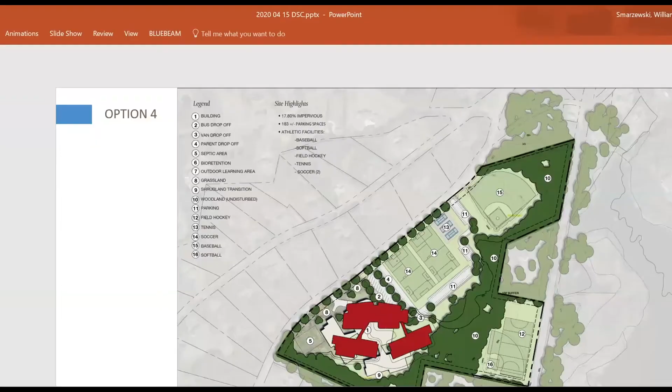Yeah, we have Bill Smarzewski from our team. So we have a small slide deck today that recalls what we had previously, as well as a sketch response to the discussion that we've had. So we can work our way through those.

I don't know if you want to, Bill, we just go right to the beginning of this one, right? Yeah, so Court, what we might be able to do is make this a dialogue through the slides to share the discussion that happened. I think that'll bring us all together, and then we'll try to manage the conversations so that we capture what they've done on the design side, any updates or changes or modifications, and then back into where it came from, what questions it answers, and what questions we want to wrestle with today.

That sounds good. So would you like us to work through a brief overview of the options and what we heard and how we responded to them? Is that what you're asking to do at this point? Yes, I think that's a good idea, to distill what you've heard and then discuss how that relates to these designs.

And we're going to give you feedback. One, do we think you heard it correctly? Do we think we communicated it correctly to you? And two, what do we do then with the outcomes of these questions and the assessments that we're making? So yeah, let's take it away.

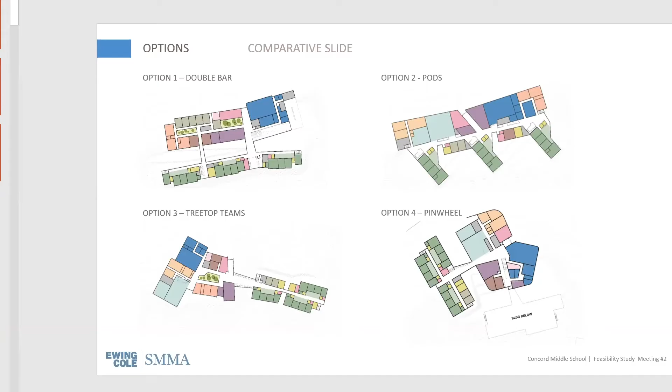Okay, so in general, we've been before you on February 13th, again on March 25th, and then today. We want to continue to show you the development of the diagram. This was what was presented, a summary of the organizational diagrams or floor plans presented on March 25th: options 1 through 4, with the names double bar, pods, treetop teams, and pinwheel.

In general, we heard some feedback around issues of fidelity of teaming, but then also on April 10th, the whole discussion of fidelity of grades was reinforced - not only the teams, but the grades. So the position of on and off team classrooms became quite important. The other things we heard were really important relative to solar orientation, integration with the topography, and impact onto the existing tree line and characteristics of the site.

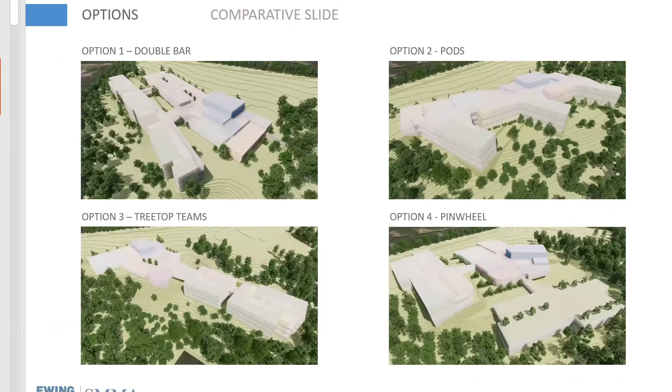Bill, just go to number 2, just as a reminder where we were, the overall forms, and then number 3, the site plan. So, yeah.

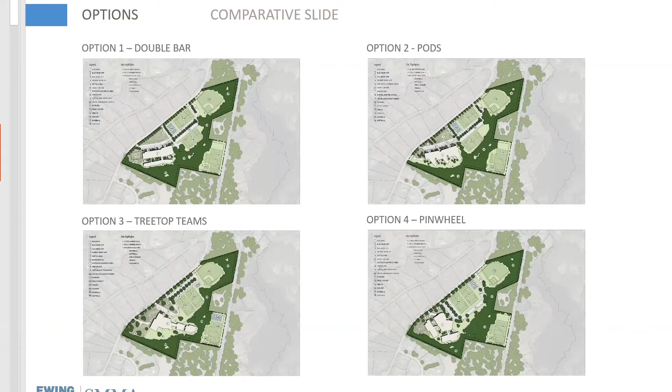Forgive me, with your permission, I want to pause just for a moment. I think this is going to help a few people based on conversations I've had. I want to hear from you, and from Lori, in regard to how you, Justin, and others are defining team. It's a concept we've used without really getting explicit with the definition, and this has come up a couple of times recently. Can we pause just to do that? I think it's critical that we do it now and not have to return to it later.

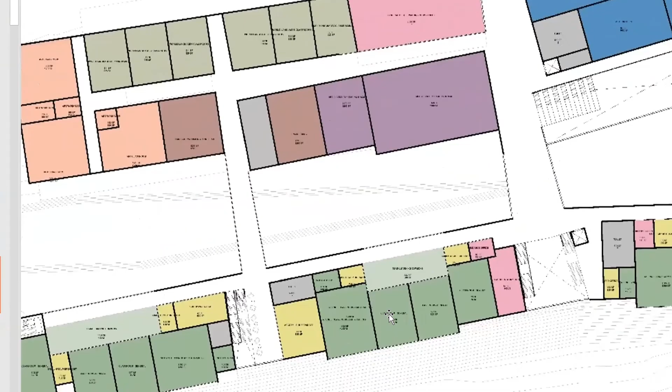Sure. Lori? Yeah, I'll kick it off and then Justin should fill it in probably. Team is really the cluster of core content areas within the grade. So you're breaking the grade into smaller components, and we've been talking about 3 teams per grade. So you divide the grade level into 3, and each team would have a core content instructor on it, which would be English, math, science, and social studies. Then they become a unit that the student stays centered in for at least those 4 classes.

And that allows us to have a much more in-depth view of the whole child, because those teachers are set up to have conversations with each other so they can talk about how Johnny is engaged and performing across all 4 subjects, and they don't just have that individual lens. Then they're integrated back into the larger part of the building for the off team, which you keep hearing us talk about - the off team classes, which might be a teacher who teaches more than 1 grade and certainly more than 1 cluster of kids.

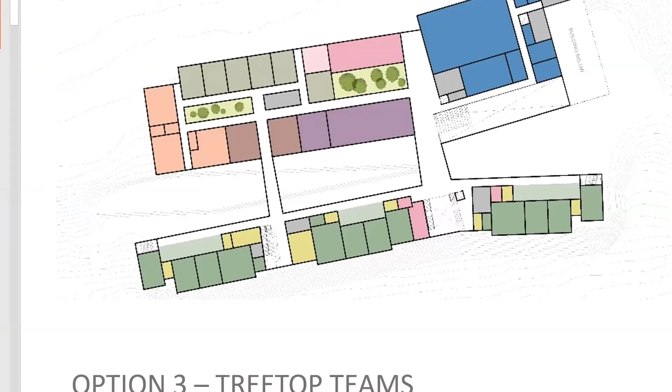All right, so population dictates 27 classrooms, approximately 9 per grade. We've got teams that are oriented around core subjects and disciplines. Is there also a classroom number, a number of classrooms that align with what you call team?

Yes, and maybe Keith can show where those classrooms match up with what would equal the space for a team. So in this diagram, and these 4 diagrams - we'd like to keep them in comparison to one another rather than digging into one of them in particular - the darker green representation of the 4 classrooms is the core representation of the team that Lori just described.

Bill, for instance, if you could highlight on option 4, a team that is organized around a common meeting space or a hub. So within a particular grade, there are 3 of those teams, and those teams are then supplemented by off-team classrooms, shown in the gray color, and by special education support spaces, highlighted in the mustard yellow color. The other pieces proximate to the educational community are some administrative areas, shown in pink.

So in general, if we're looking at option 4, you can see 3 separate teams. Bill, if you could point to the core teams, and then highlight the relationship of the off-team classrooms. If you look to the upper right within option 2, the pods, again the team itself would be the 4 darker green classrooms. Immediately outside of that is the lighter green collaborative space. There are some workshop rooms that face there, and then the off-team classrooms are just along that main corridor, together with additional support spaces. So that's the organization through each of the options.

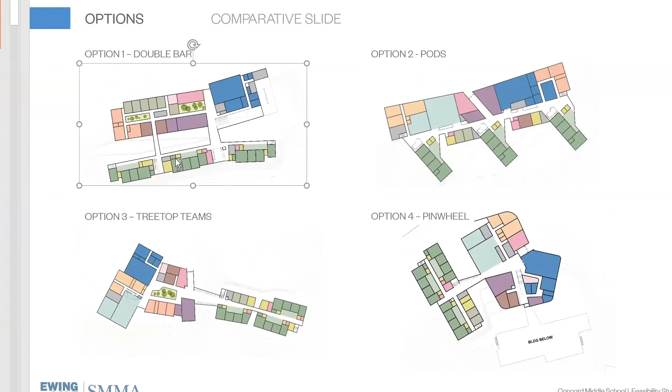So Bill, if you could just highlight those in option 1, where the off-team classrooms are relative to the team. So in those spaces right there, and generally world language classrooms are there.

Is that helpful, Court, in terms of how they're represented and dispersed within the various options, or is there some other question I can answer that helps it become more clear?

Three grades, nine teams, and nine teams require 36 classrooms, although we have 27 traditional classrooms called out in the spreadsheets. Am I correct, Lori? I'm trying to mix and match that in my head without all the documents in front of me. I would defer to Keith here, but I think the other nine classrooms Court is referring to would be the science classrooms included within each team. Right? Correct. That's how you get to 36.

So yeah, I think that's correct, Keith. I just wanted to make it really clear to everybody how the terms align with the other terms, because I think it's going to be useful as we dig deeper into these designs and which ones seem to favor the approach that the leadership team, Lori's leadership team, is promoting. I'm sure we'll get there pretty soon. Thank you.

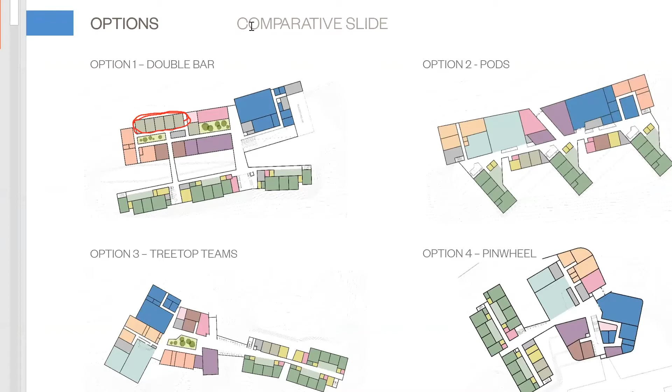Bill, if you could just highlight that in option 2 so everybody can see what we're talking about. It's that color there. So you can see the green is the cafetorium and the orange there. The other specialty classrooms are the art classrooms, and they're just a little bit more pinkish, and they're there.

So there's the team, the off-team classrooms, there's art, there's music, and then there's a kind of technology component. The technology component is shown in that more brownish tone that Bill is highlighting. That's things like digital literacy and related topics. Hopefully that shows the major organizations of the instructional components, which if I could generally categorize them, would be the team, the off-team classrooms, and the specialty classrooms.

With that, we would be prepared to talk through, maybe we could just go to number 3, slide 3 for a second, Bill.

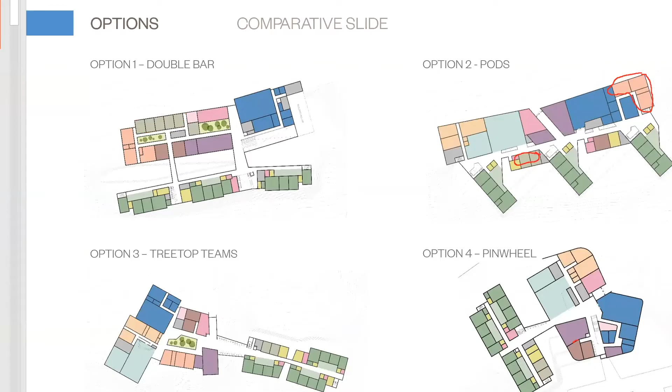So Court, we're hearing feedback relative to the educational leadership team, and we're hearing feedback from the design subcommittee. We think the educational leadership team is communicating things to us about the fidelity of teams, how students interact within teams on a given grade, and how they circulate between what might be considered a team classroom, the team hub or common space, and then also both the off-team classrooms or the specialty classrooms. At the same time, we're hearing feedback from the design subcommittee, which is focused on things like ideal solar orientation, how the building sits on and recognizes...

I think we lost you, Keith.

But I think he's getting to the good point where we're trying to get some convergence on this. Yes, we talked a lot about that the other day too. They've been taking all the feedback that Court, you did a nice job of aggregating from the design subcommittee. So they've been factoring all those pieces in as well.

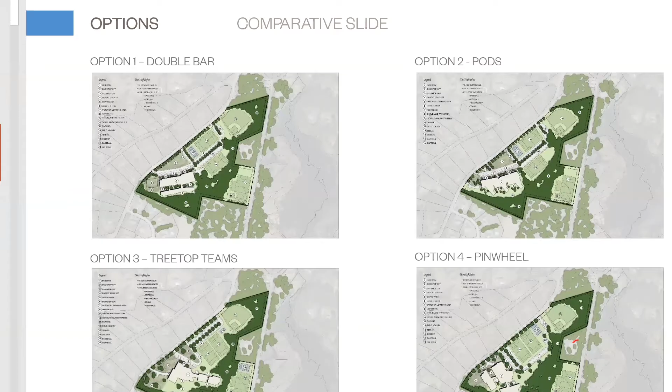Lori, while we're waiting for Keith, I don't know if we'd be moving too fast to have you complete the thought that started.

So from the design subcommittee, we heard about the solar orientation and the importance of that, the orientation of the building in relationship to the public street, and the concern that some of the schemes didn't have enough frontality. Also a concern, in particular in one or two schemes, to what extent the scheme was actually extended into the woods. That was the case of scheme number 3.

So what we've tried to do is begin, at least in a couple of the schemes where the solutions were more obvious, to try to respond to some of this conversation.

We also heard that people really liked the idea of a commons where in one space you can actually view the gym, the cafetorium, and the media center. That's sort of a public space at the entryway which allows you to survey the entire public aspect of the project.

I briefly lost my connection, but I'm back.

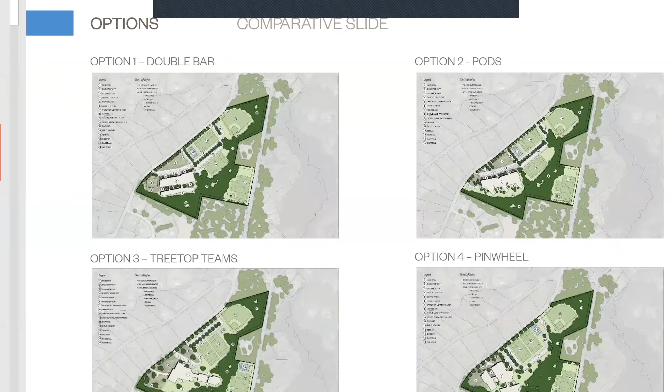So Bill, if you could go to slide number 5 for us. And can you pan back just a little bit so we're able to see the whole image? I guess maybe I just dropped my.

Court, in our dialogue thus far and in our discussion relative to option number 1, in our discussions with Lori and Justin last week, and then also our discussions with the design subcommittee, there wasn't a lot of programmatic or educational adjustment to option 1.

One of the things that we did realize in the generation of the data is because we have these 2 courtyards in the western portion of the northern floor plate—Bill, if you just point to those—that was driving the area of enclosure for this option significantly higher than each of the others, right? And so really what we looked at is whether there should be a modification to make it more apples to apples. You could potentially look at reorganizing that portion of the plan to remove the courtyards and therefore reduce the amount of surface enclosure and get it a little bit closer relative to the overall cost. You can see that illustrated on the right-hand side under the April 15th piece.

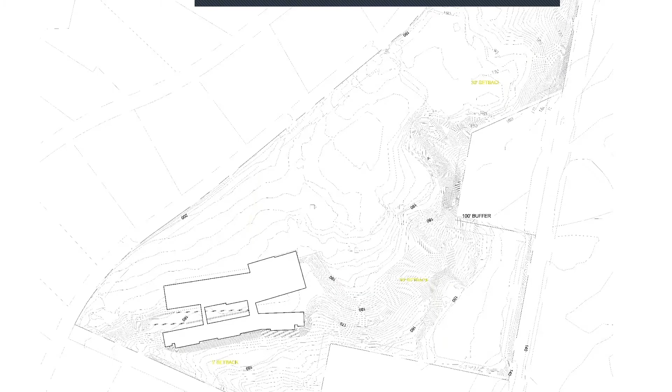Good, so Bill, if we just continue to move through the deck, this will show you, this was the site plan we had shown previously with the footprint from March 25th. That footprint has been modified just ever so slightly. You can see that we've taken the courtyards out, and when you place that over the previous plan, you can see it's fairly quite an innocuous adjustment to the footprint. But notice in the lower right-hand corner, the north arrow.

So just to, as Dawn said, this is a strong solar orientation for the entire building. So that sequence of slides shows the responses that we've made to each option. And if you're ready, we could move on through option 2.

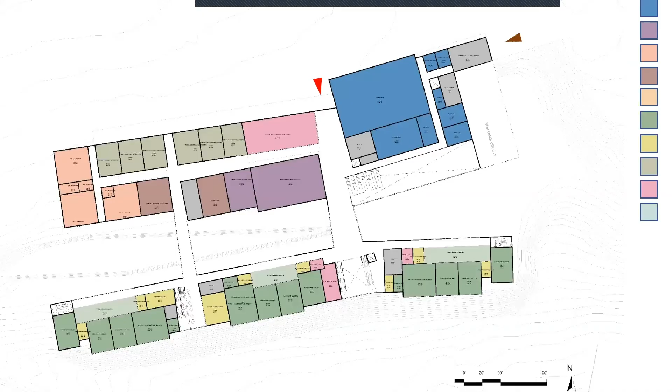Option 2, actually we have not made any adjustments based upon the feedback we've heard or the way that they function. So on the right-hand side you can see where we were on March 25th, and for today we have left this one essentially unchanged and intact.

Court, is that adequate for this, or would you like a little more discussion of how Lori and Justin see how this one might function? Or I think we need to hear from them as to how it supports or doesn't support their approach relative to the other 3.

So I'll start that and then Justin can hop in. Again, the team spaces are distinct, as you can see. So that was a large part of our discussion, that this would not lend itself to grade-wide activity as much. It's a very consolidated plan, so travel time is likely to be improved for sure.

We talked quite a bit about the off-team classes, which you now see are in between the teams. I think we've weighed pros and cons of where some of these off-team classes are, particularly world language, which is so close to a core content area for us that I think we did prefer it having more proximity to the teams, whereas in the first one it was very separate.

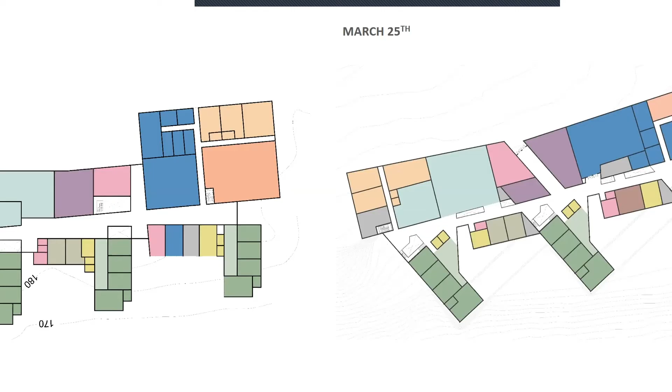Can you go back to the site plan, Bill, that shows this relative to the northern orientation? It's kind of, by the nature of the scheme, Keith — the long axis of the building versus the short axis of the wings — going to result in one of them getting the wrong solar orientation. Yeah, by definition, the only way to solve that is to array all the classrooms in a long corridor, which will make this building exceptionally long, and a very problematic long corridor as the spine of the building. It'll be sort of scheme number 1 on steroids.

Yeah, exactly. Thank you. I wasn't advocating for it, Saul, so much as simply wanting to hear, for purposes of the meeting and the record, that you took a hard look at it, and this is what can be done with option 2 vis-a-vis orientation. Thank you. Yeah, now, option 3.

Sorry, before we jump to that — this is Matt Root. Court, thanks for asking that question about orientation. Can we just dwell on it for a second? It looks like the furthest out classroom still has pretty good orientation, right? It's got two sides that are somewhat facing south. It's really those three classrooms more interior within the team structure that are starting to face west, right? Mm-hmm. Yes. But it could be strategic window placement and exterior shading that could help mitigate those issues a little bit.

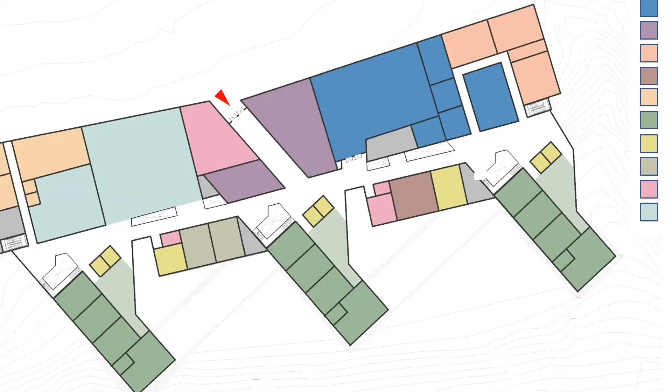So I'd also like to make sure everybody understands that when we met on April 10th, we reviewed every option from an educational perspective, then looked at each option's ability to be manipulated, advanced, or revised to address those concerns. So it's not like we didn't look at number 2 or number 1 and make more aggressive changes — we thought that through discussion, the possibility for modifications to 3 and 4 were most pronounced, and you'll see a much different approach to those. So, option 3 — you can see the advancement of the idea from February 13th to March 25th to April 15th.

So the big advancement from the 13th to the 25th was to integrate the off-team classrooms into their own little pod, so that they're fairly proximate to one of the teams, and to create more proximity between the various hubs. As we talked to Lori and Justin last week, it became apparent that some connectivity between those team spaces to reinforce the sense of a grade was increasingly important. So you can see what we've done here: in addition to rotating the building to an ideal solar orientation, we've taken the northern team, slid it to the middle of the educational community piece, and flanked it with the off-team classrooms. Now there's a much more interactive location of the various team spaces, and getting from any given team to any off-team classroom is quite dynamic and proximate.

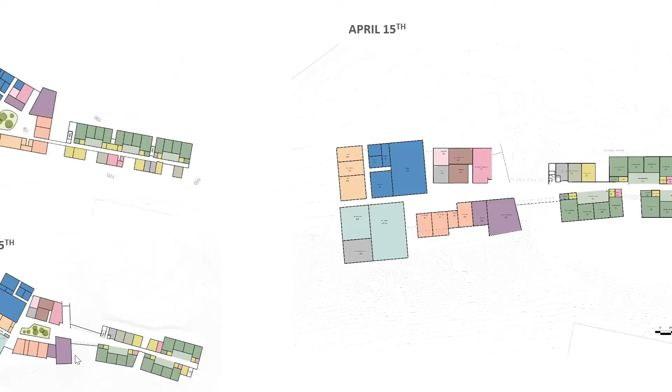Did we lose a bridge too? Did the previous one have it? No, it's still here in the central connection. Well, the central one, but was there a smaller one in the previous design? No, I think that was scheme number 4. If you go to the floor plan, Bill—there's not one between. Okay, no.

One of the really wonderful things about this is that each of the hubs is surrounded by their team classrooms, but they also have direct exposure to glazing that gives views to the north and south. Not only does that introduce natural daylighting into those hub areas, but it almost expands and captures the circulation corridor for greater utility during teaching times. While people are going back and forth between classrooms it functions like a corridor, but while teaching, it naturally expands the educational utility of those spaces and provides natural daylighting. We've pulled the building apart just a little to allow that to happen. There's also a natural cleft in the site—we use the word ravine, maybe exaggerated for the topography—and that's where this bridge goes over. So the building is still located in relationship to that in a smart way.

So I'm impressed. I've got a question or two, but I'd like to turn it over to Lori and Justin first, and then other committee members. What questions do we have? How does this optimize, if it does, the plans for teaching and learning, for community building, for team integrity, as well as grade integrity, if we could look at that. And then, of course, some of the aspects around likely efficiencies and economies around design and cost. Justin and Lori? Sure.

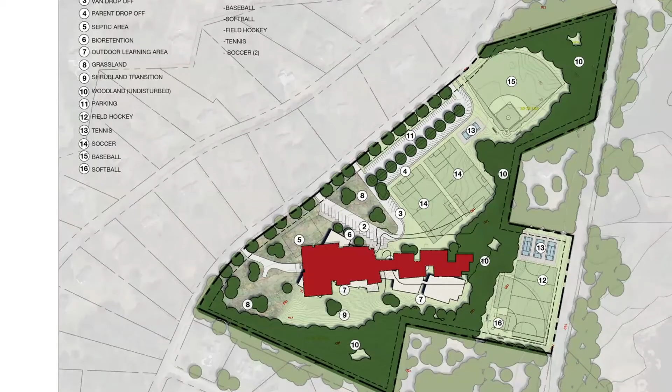Now, option number 4 also was ripe with modification opportunities. If you see again, the same pattern from February 13th to March 25th to April 15th—what we heard is that initially this option had tremendous potential for that grade fidelity we're talking about. It was the kind of grade level unit you see on February 13th that we actually imported into option 3 for April 15th, because of the proximity of not only the teams but the proximate off-team classrooms.

At February 13th, there was fairly significant concern that with the 3 one-story pods, it was taking up a lot of the available topography. So on March 25th, we took the eastern classroom community and stacked it on the west one.

It had great interactivity between the teams and their off-team classrooms, and it's also very proximate to the town hall component of the building, so the travel distance for a student to go to art, music, or the library is relatively short compared to the others. The Achilles heel of this one was a concern over the solar orientation of the classroom blocks—you could almost argue that 50% of them had east-west orientation rather than north-south.

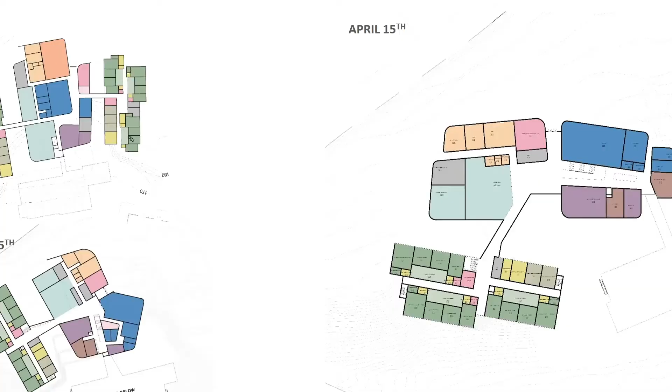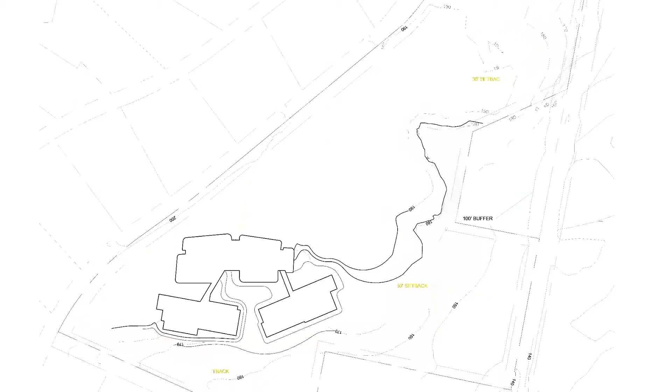So this was the previous orientation, and the criticism of it was valid, right? When you look at it relative to solar orientation, with our footprint modifications and rotation, you can see it's in a much more favorable position. And when you look at it relative to where it was, you can see it still retains the essential qualities we had, but also addresses some of the significant weaknesses that were in it.

One of the things that rose to the top in our discussions with Lori and Justin was the possibility of a sixth grade academy, that not only would the sixth grade have some grade fidelity, but they might even be slightly set apart from 7 and 8. And this one offers that possibility the most strongly, I would suggest.

Let me add to that so it's clear why that is. On this diagram, the colored team space that's green and shows all the color is a 2-story spot that could house 7 and 8. The black lined footprint is a 1-story built into the hill that could be grade 6 to house the teams there. So that's obviously intriguing to us, given our experience with the Peabody building being so separate.

A lot of the other positives we saw here are similar to the third option. The sightline is great, obviously, but the rest of it with the town hall for the school culture and then the team and grade levels, I think works quite nicely.

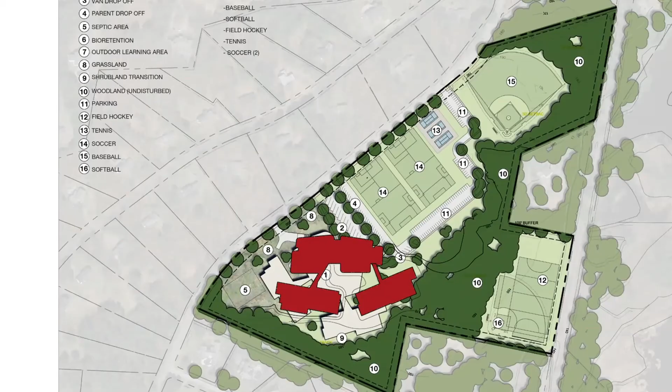And the one to the east is the single story, and the one to the west is the two-story still, correct? Yes, and the eastern one steps down, follows the contours of the site generally. So is that one in line with the lower level on the west? No, it's below. There's a small art classroom portion at the lower level of the northern public hub building, and this is 15 feet down. So you have to go downstairs from that central hub on the north to get to that wing? Yes, here it's an open stair opportunity, but yes, you go down and then come across it. It's very similar to what was shown last time.

Do you have a lower level floor plan? Below, so this is ground floor.

I'm sorry to make you go back over this if you went over it already. No, it's okay. Bill, do we have one in this deck? Is that something you can pull up? Not in the deck, but we have one. We do have it, I don't think we put it in here, but we could. Yeah, we looked at it last week.

One other thing about it, Don, with the classrooms on the lower level, they can have exterior workspace, which is kind of nice, in the lower courtyard. And there's a lower level of the western wing as well, right? No, the western wing has an upper level.

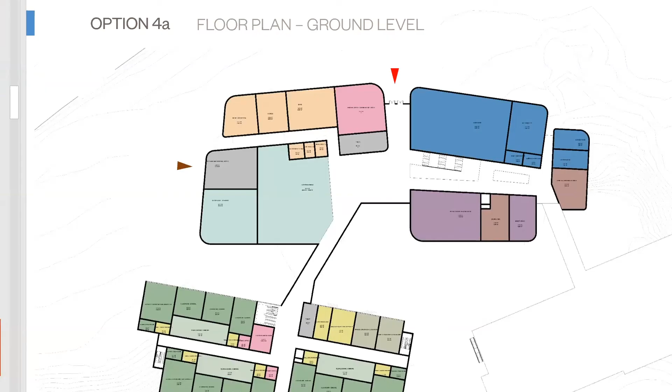So we have three different floor levels, none of which have two teams, or two grades, on them. Yes, in this option that's right. Okay so everyone understands that. Call it a lower level, which is a level below the floor that you enter into, and that's on the east. There's nothing on the ground floor, which is the front door level on the east, but the west has one story, and then you go up that one to get to the next grade. And the thought was that the roof of east would be a roof garden and a play area accessible from the main floor, which would be really wonderful, like a play area surrounded with trees.

I guess in my mind, I don't see how that's more beneficial than just having ground floor site availability. I don't know, others could argue with me. It's not like we're on an urban site. On an urban site I'd completely be like, oh my God, great idea. Here, that's my personal opinion, but I could see parents being concerned about that.

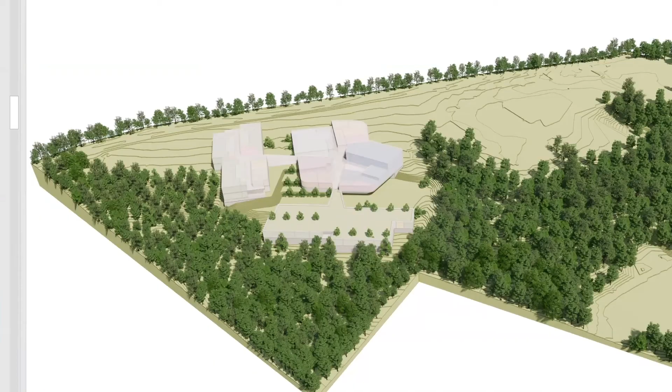What do you mean by that? When I talked with him—I'll interrupt, because that's coming from me. If this were to be the choice, which isn't necessarily my first choice, I think there are pros to this one and three. We've been well supported in other projects for those kinds of projects on the grounds around the schools, but that's a big hypothetical. There's also a lot of funding out there for roof gardens from independent trusts and other places, and one of the hospitals we worked on actually tapped into that.

I don't know, maybe it's just my logistic mind working today, but that decreases the availability of roof area for photovoltaics. It also means longer runs for mechanical systems because you're not coming directly down—you'd in theory have to put them on the central bar and then, from a distribution standpoint, carry them through that bridge or corridor connection and down a level.

So again, I don't know. I'm not saying I don't like this option, I'm just thinking about the pros and cons.

This is Charlie. I got dropped off several times because of issues with my desktop, but I continue to have concern. I'd agree it's great that this has been resurrected and looked at in some creative ways, but it worries me that we're getting a little complex here with distribution and shapes, and, to Don's point, funds.

The more distributed you are, the harder it is to put it all together from a heating, utilities, cooling standpoint and so forth. I also agree with the comment about the rooftop—I'm not sure, again, we have 25 or 30 acres, I'm not sure how much land we have, but why we would need to do something beyond what we have with the property on top of the roof.

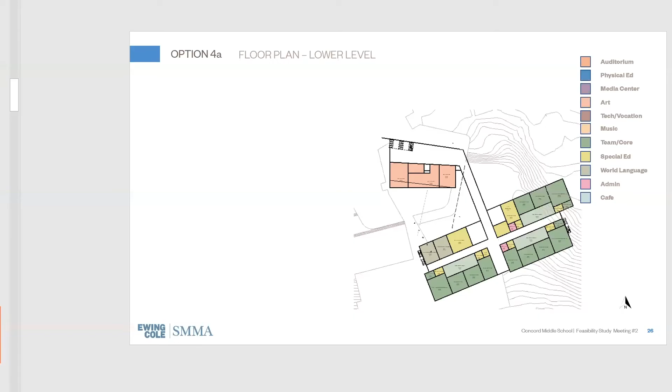It's definitely down the hill, right? So in theory, it's below the tree top. I guess I don't know enough about those trees to know. I assume in spring and summer they're full, and in winter they lose their leaves. It looked a little potentially problematic to me. I've got to get that sorted out. That's one factor that ought to be looked at.

And I guess we're going to have data on the effect on heat load from being distributed like this. Maybe there isn't much of an effect, I don't know, but it would seem it would be a little bit more burdensome. Maybe SMMA can comment on that, and that can be now or later, but let's note it if we're not going to get a response now. Quick question, thank you for bringing up the lower level.

This is down a level from the entry finished floor, the entry level. So are you having to fill that whole east side? Are those 1 or 2 foot increments? What are the topography details on that? The topography is not correct on that drawing, but this is very rough.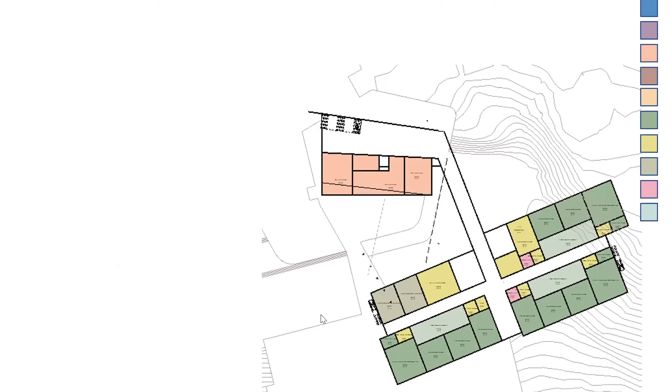Okay, so the answer is we don't know yet. Okay, it'd be terraced down, similar to what we showed at the previous meeting. If there's no objection, and please object if it's helpful to do so.

I want to watch our time and ask this question of the design team and the design subcommittee. Do we want to press the design team to bring these now modified concepts to the estimators, since they're still in the early stage of their work? And design team, is that the right thing to do right now?

So I'll put it to the design subcommittee: can we use our time to greatest effect to put forward the questions that are going to be critical, and better sooner than later, about the auditorium and gymnasium? What do you think?

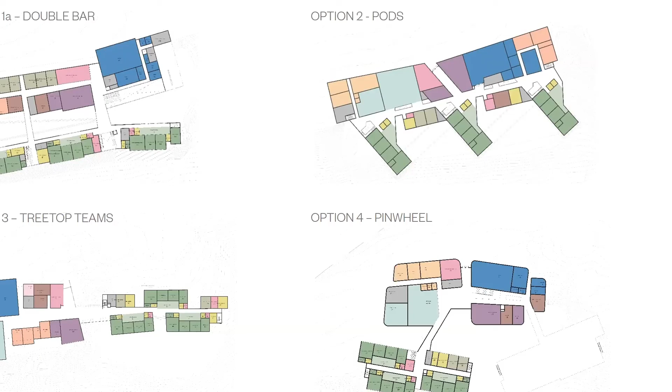This is Phil, just for a little bit of clarification: the performance area, if in the cafetorium, would be what we refer to as a platform, not a stage. So it doesn't have operable curtains, and it's far more modest in its configuration. So you have 3 very different performance type spaces: a platform in the cafetorium, a black box theater as one of the other distinct spaces, and the third a conventional theater auditorium of multiple sizes.

Okay, so Lori and Justin, knowing that we've got fiscal constraints that are unknown but real, is a 1 grade level auditorium aspirational, or is it something beyond that?

Well, I'll start, I guess. When we made the shift to the cafetorium, we understood that we were trading the ability for what Phil just described as really that stage environment.